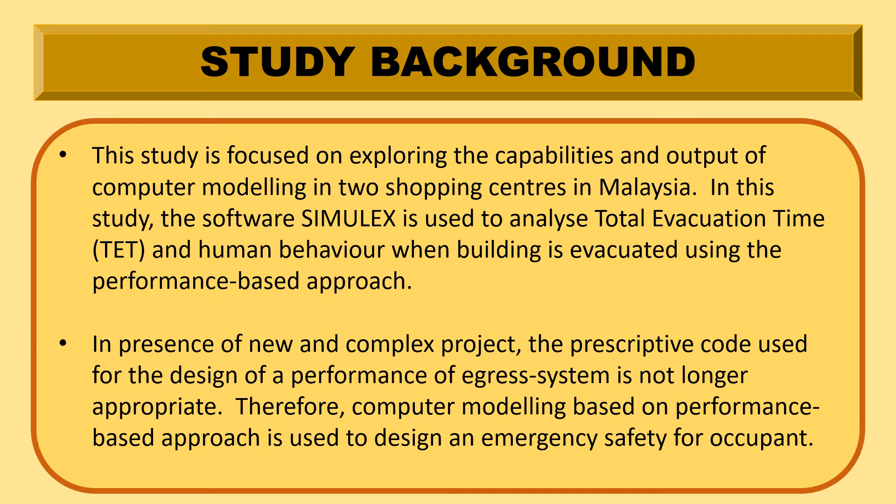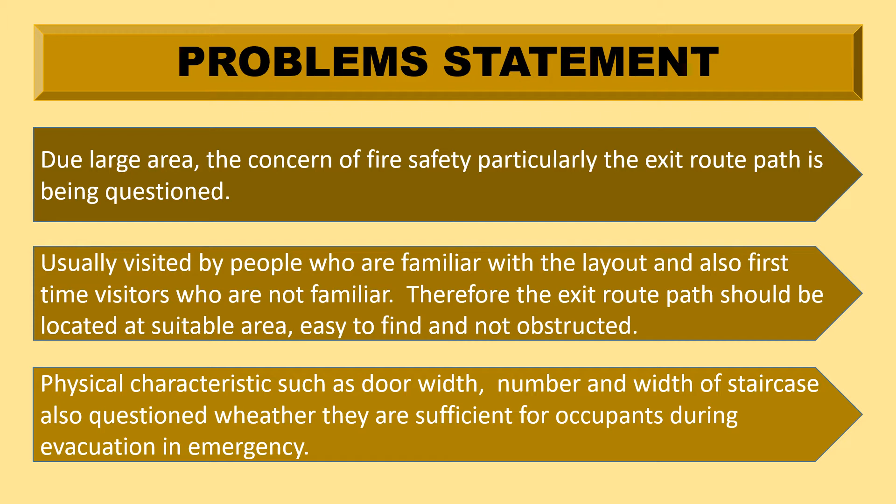This is the problem statement. The first one is, due to large area, the concern of fire safety, particularly the exit route path, is being questioned. Shopping malls are usually visited by people who are familiar with the layout, and also first-time visitors who are not familiar. Therefore, the exit route path should be located at a suitable area, easy to find and not obstructed. The physical characteristics such as door width, and number and width of staircases, also raise the question of whether they are sufficient for occupants during evacuation in an emergency.

The scope and limitation of my study: first, it is limited to two selected shopping center buildings. The shopping center cannot be modeled as per operation but as per design, because of the complexity of the tenants and retailers, which is too difficult to model. I will use SIMULEX to simulate human movement and behavior, but this software does not consider fire elements such as fire spread, smoke spread, or fuel load. I only refer to Malaysia's prescriptive UBBL 1984, focusing on the area of the bylaw covering evacuation only.

In SIMULEX, I will use shopper characteristics as input for calculating the evacuation time.

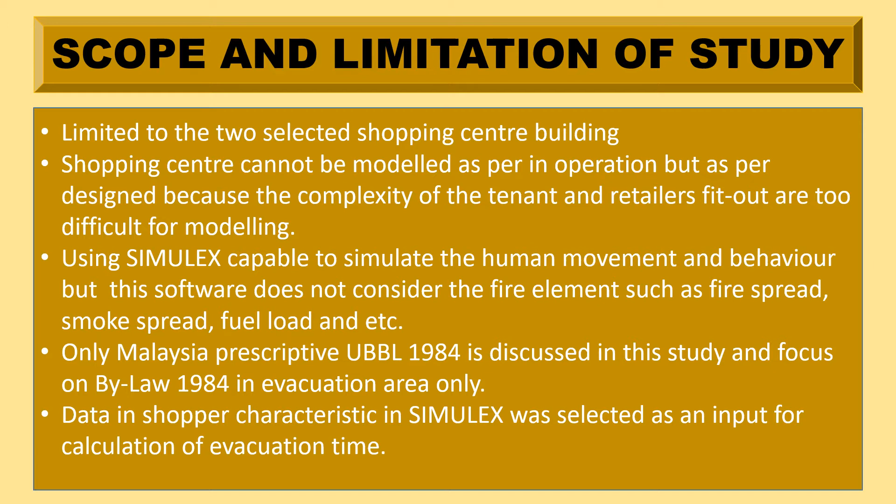For the literature review, I focus on means of escape. A means of escape route is an escape route that leads to a place of safety such as open air outside the building, or in a large building where that is not possible, it should be possible to reach a place of reasonable safety such as a protected staircase, where people can travel in relative safety to a final exit.

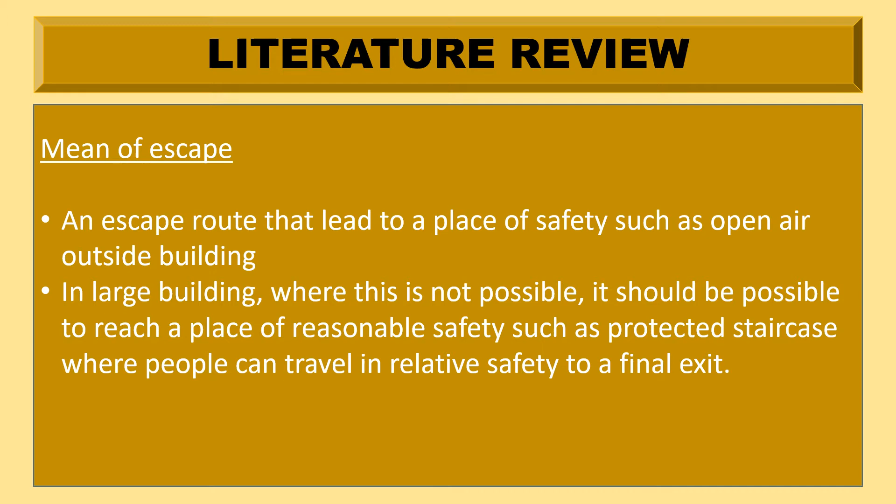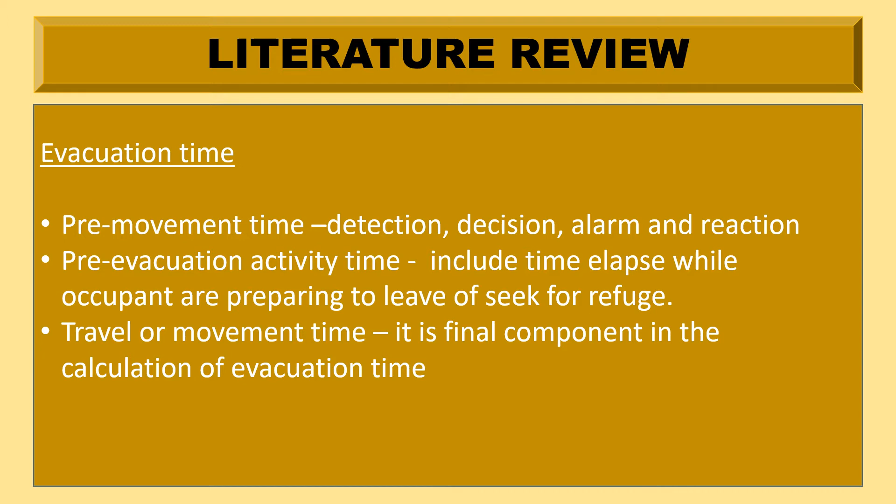Evacuation time actually has three stages. The first one is pre-movement time, for detection, decision, alarm, and reaction. The second is pre-evacuation activity, which includes the time elapsed while occupants are preparing to leave or seek refuge. The third is travel or movement time.

This is the principle of safety. The important thing is at least two ways out remote from each other, and additional exits according to the number of people and relative fire danger. Evacuation drills should be well planned, and exits should be at a reasonable travel distance, unobstructed, marked, and well lit.

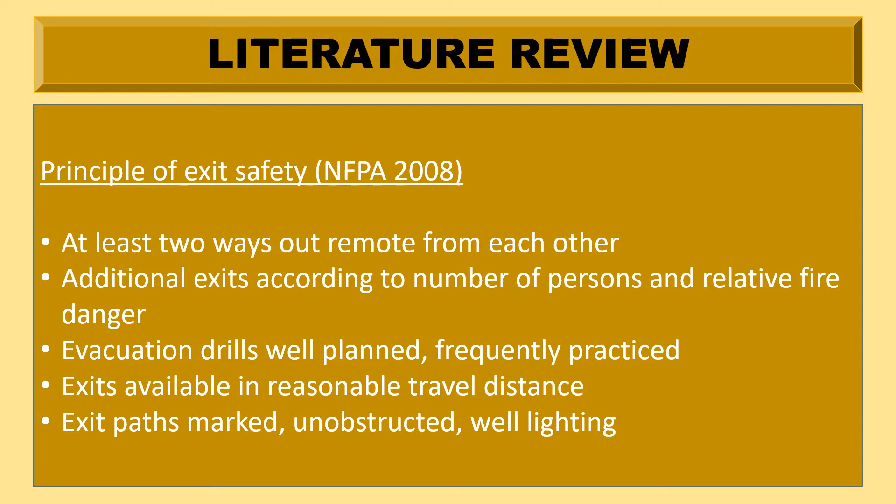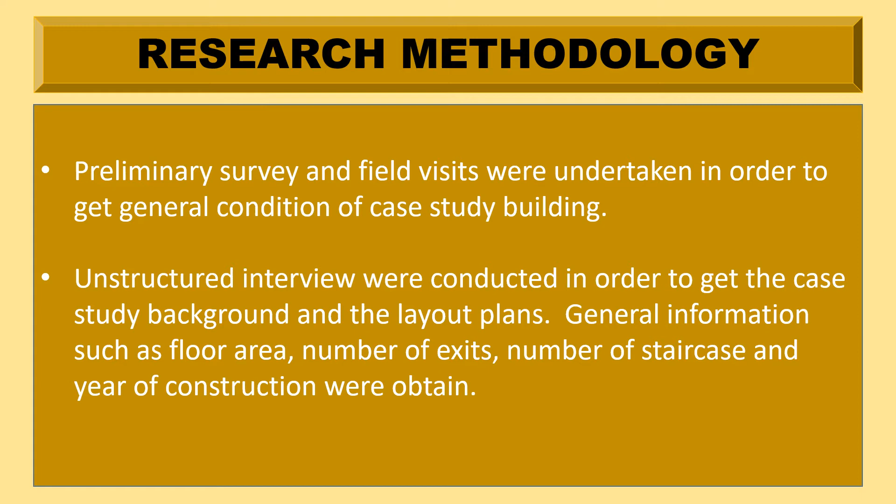This is the research methodology. The first step is to do a preliminary survey and field visit, and then conduct unstructured interviews to get the case study background and layout plan. Information such as floor plan, floor area, number of exits, number of staircases, and year of construction is also obtained. Then, after I get both layout plans, the layout plan is drawn in AutoCAD first before it can be exported to the computer model for simulation.

So the CAD model will be generated as a DXF file and exported into the SIMULEX software. Then in SIMULEX, the exit points are defined and located. This follows 100% the original hard copy layout plan that I have obtained.

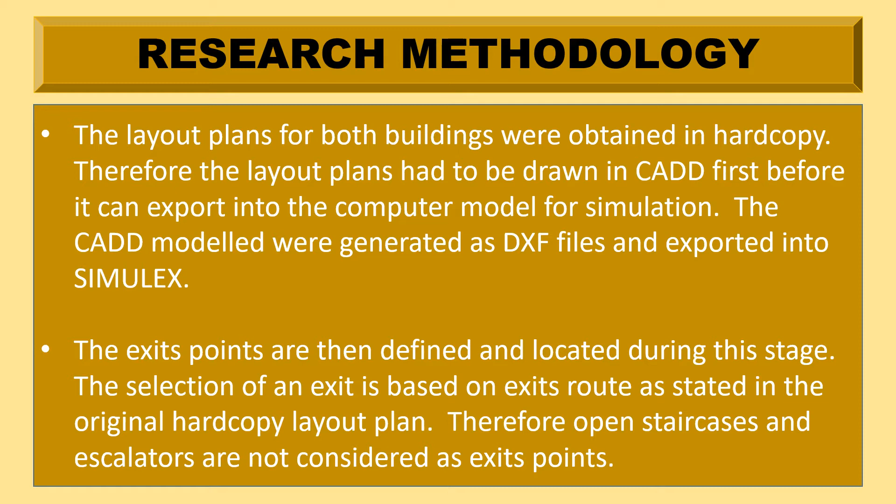After all information has been put in and the model is complete, the distance map is calculated. The distance map indicates the exit route for every occupant in that building. The simulation begins after the program finishes calculating the distance map, so the simulation time depends on occupant load, floor area, obstruction, and the number of exits provided.

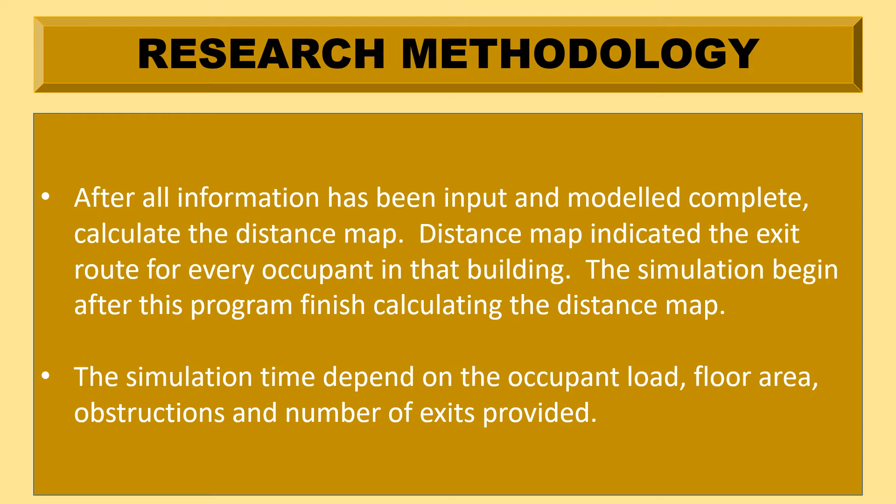The result shows the number of occupants that evacuate the floor area generated every 5-second interval. The total evacuation time for every floor level can be determined after the simulation ends. The results obtained for every floor level for both buildings were compared and analyzed.

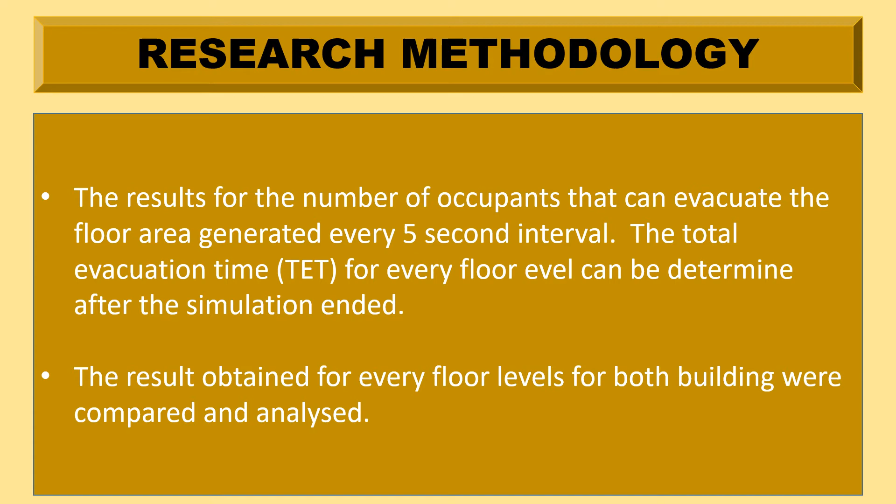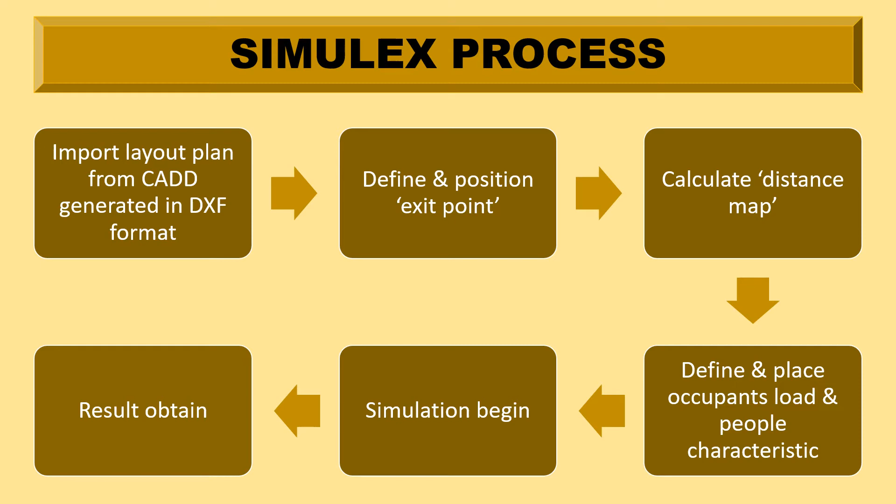This is the process of SIMULEX: import the layout plan from AutoCAD, generate in DXF format, then define and position exit points, calculate the distance map, then define and place occupant load and people characteristics. Simulation begins and results are obtained.

For shopping center B, also 5 levels, but the naming is different compared to shopping center A: floor 1, floor 2, 3, 4, and 5. This is the number of exits: floor 1 has 4, floor 2 has 3, floor 3 has 4, floor 4 has 4, and floor 5 has 3.

This building also has different door sizes. For the first 5 seconds, you can see floor 1 only has 7. As mentioned, 2,000 people are distributed randomly for every floor level. This is the first 5 seconds number of persons, and then the total evacuation time. We found the total evacuation time for shopping center B is 25 minutes 13 seconds.

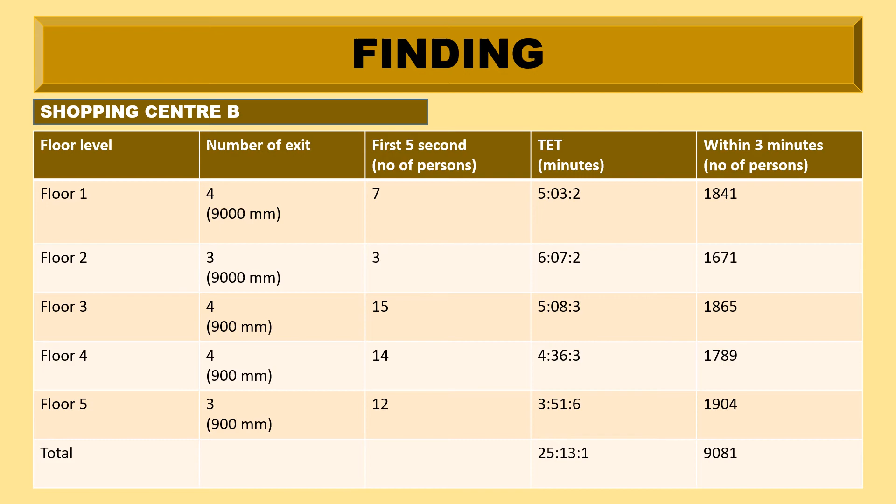For the overall result analysis: the number of people that can reach the exit point in the first 5 seconds - comparing both shopping malls, due to the different size of floor area, the results indicate that the number of persons who can reach the exit point for shopping center A is higher compared to shopping center B.

This is because the travel distance to reach the exit for shopping center A is shorter compared to shopping center B. Total evacuation time indicates that the number of exits provided gives significant influence to the time elapsed to escape. The results demonstrate that the size of floor area does not affect the escape time when the exits provided are sufficient. The number of exits provided exerts a significant influence on the escape time for occupants.

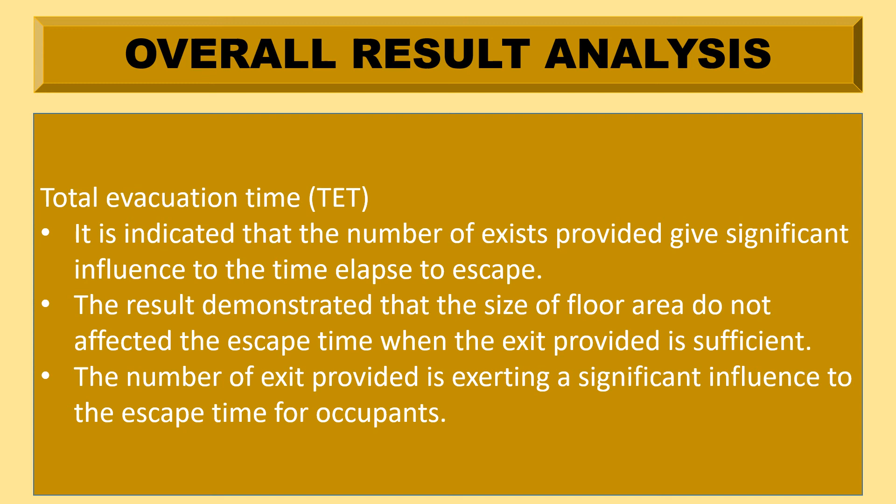Overall, for the number of persons that can reach the exit within 3 minutes, it was found that the number of occupants reaching the exit point for shopping center B is higher than shopping center A. Again, this indicates the number of exits provided gives influence to the escape time even for a large floor area. The percentage of occupants who can reach the exit point within 3 minutes in shopping center B is more than 80% compared to shopping center A.

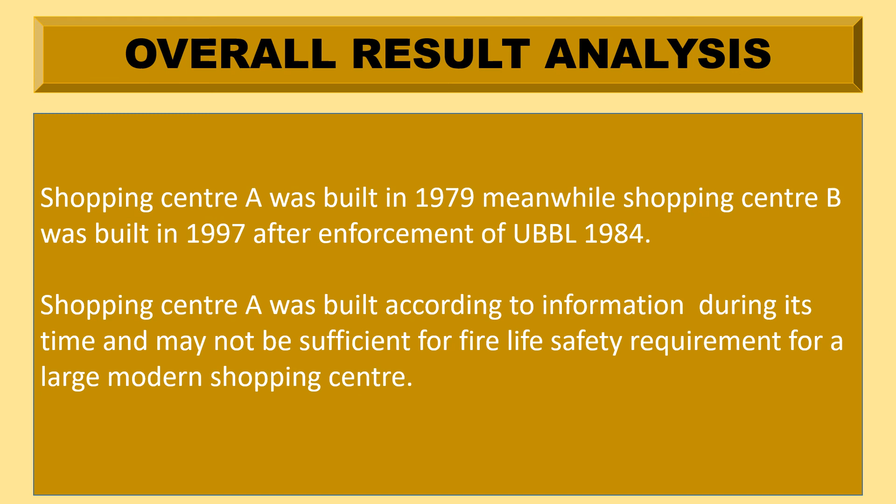For your information, shopping center A was built in 1979, while shopping center B was built in 1997, after the enforcement of UBBL 1984. Shopping Center A was built according to information during its time and may not be sufficient for fire life safety requirements for a large modern shopping center.

As conclusion, as stated previously, the purpose of this study is to explore the usage of computer modeling using SIMULEX software. Two case studies were selected in order to achieve the research objective - one was built before UBBL 1984 was implemented, and the other was built after that. It is found that the number of exits provided has a significant influence on the effectiveness of evacuation.

It also showed that the exit width influenced the effectiveness of evacuation. It can be concluded that the performance-based approach can be implemented to evaluate the effectiveness of the evacuation process. This is because the effectiveness of the evacuation process is an element that will be questioned by local authorities and the public, regarding whether sufficient exits are provided for occupants to escape during an emergency.